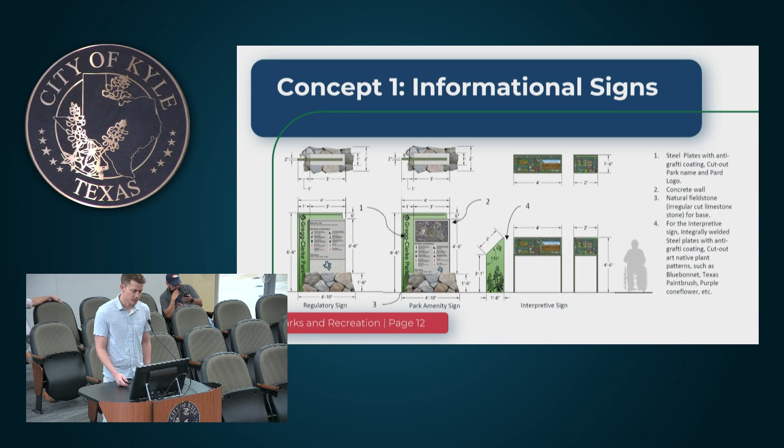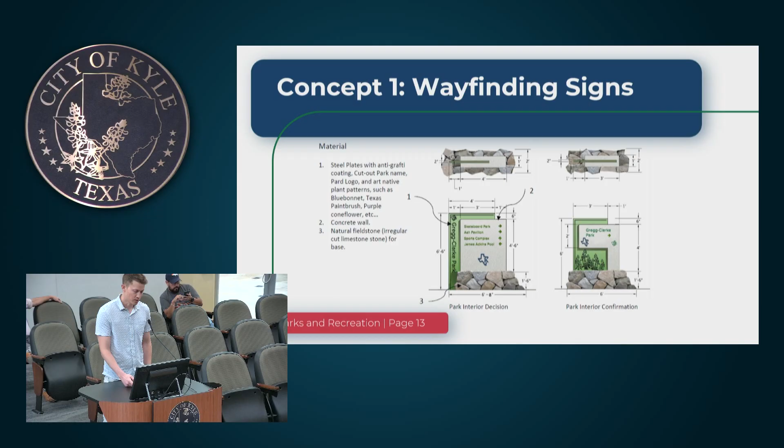These are the wayfinding signs - this is the vehicular wayfinding in particular, which also has the limestone base, the concrete, and the steel backing.

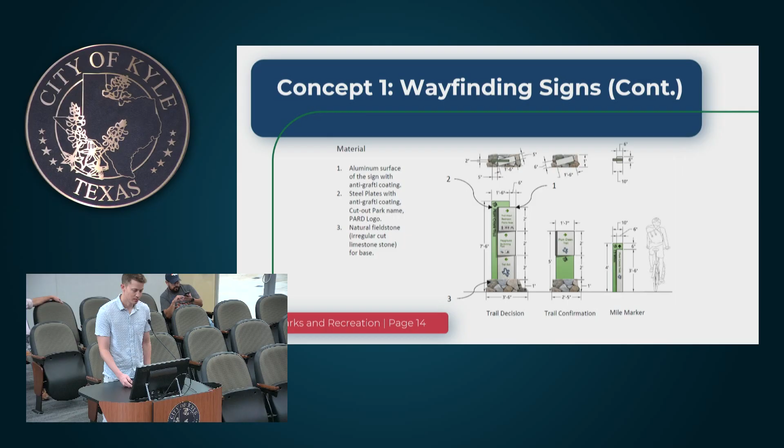And then this is the wayfinding for pedestrians. Instead of a concrete face, we use an aluminum one here, since it would be hard to install concrete at that scale. Another interesting thing about this sign is that the actual face is angled in the direction we're pointing people, adding a subtle design element to enhance the direction we're trying to tell them to go.

And then this is the night scene for that. So we wanted to give a view showing the lights, potential for lights with this sign, so that this also adds another potential way to customize these signs. You could use different colors for these lights. You could light up the plant imprint a certain color, or have the lettering in another color, or just have a color palette that you use to cycle through the various seasons or holidays, events, whatnot. Just adds another way that you could potentially customize these.

All right, moving on to concept 2, we called this one Refined Heritage. This one drew a little bit more inspiration from the European style that we mentioned earlier. So this uses CMU walls with natural stone veneer, and then a steel plate as a backdrop. So we have the historic look, but it's more of a modern construction method, so you get the best of both worlds.

We use native limestone boulder for these. These also have loose boulders, and they'd be rather large boulders, 2 to 3 feet in width, so that would give a different look than some of these other signs that we have here. And then modern accents, so we chose an aluminum surface for this sign, which we'll see next.

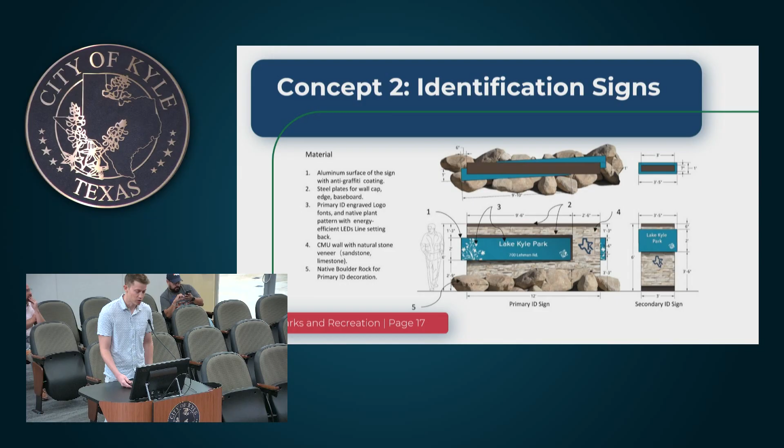Here's the informational signage, so it's very similar in look and materials. These will just provide the information internal to the park to the users. Some of the steel posts on those signs might be better suited as aluminum, but that's the kind of detail we haven't finalized yet.

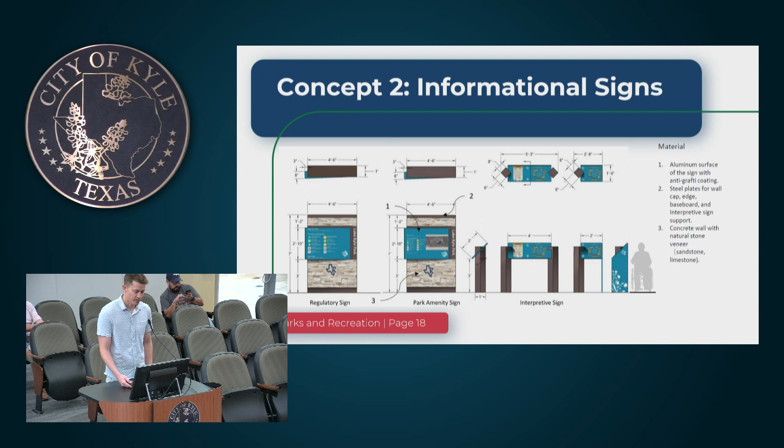And then here's the wayfinding signs for the vehicles. This is also very similar in material and look. And then this is just designed to kind of have signage pointing in a direction on the side that's pointing, so it reinforces the direction that amenity is located.

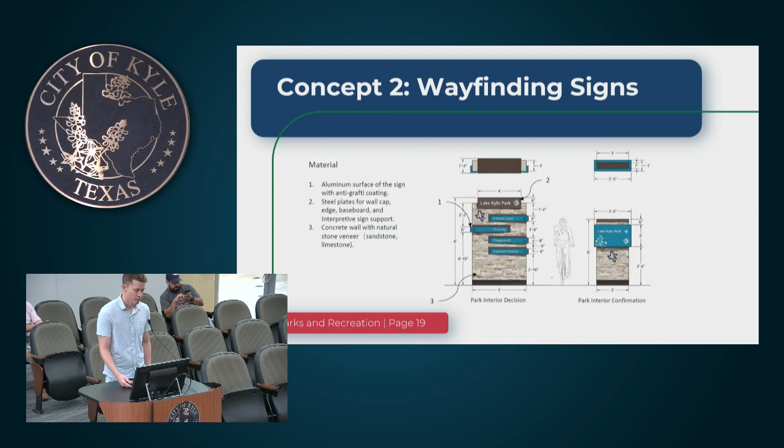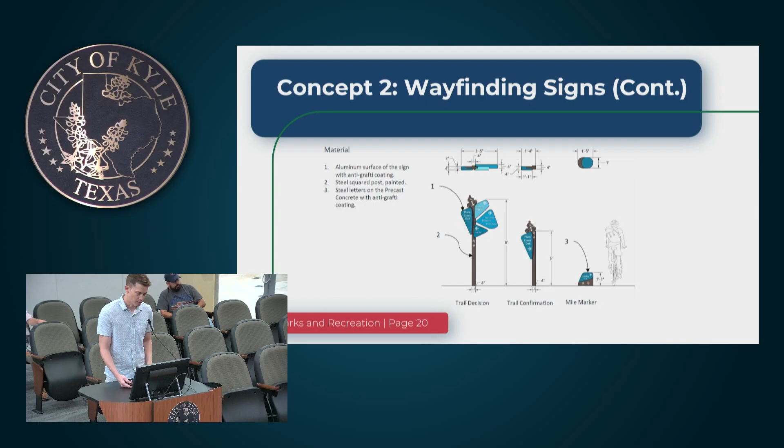And then this is the pedestrian wayfinding sign. So that sign on the left there, the Trail Decision, that's actually inspired by the PARD logo that you just asked about, Ryan, earlier. So we used the PARD logo to design that sign. We thought that was a neat little touch there. And then it would be the steel post with, I guess this one would be all aluminum if we substituted the steel for the aluminum. And then this is the night scene for that one as well.

All right, concept 3, we're calling Texas Patina. This really leans into the rustic look. We wanted to highlight the rugged and raw aesthetic found around here in the natural Texas landscape, using organic elements, color palettes, and materials. So we have a really earthy palette, and basically all organic materials for this sign. And then we have a raw weathering steel backdrop, or Corten steel, that provides a different look, and it's also designed to rust over time, creating its own story visually as it ages.

Before I get off that, one thing to mention with the Corten steel is that first, it's going to take about a year to rust. That first year does have potential to stain, so it's just something to keep in mind. If you pick something like sandstone underneath, that's not going to be very noticeable, but if you use, let's say, limestone with that, you might have noticeable stains there. So just an option there would be to use aluminum instead, or to weather it ahead of time.

And then we have the sandstone base, and then the wood backdrop. Another thing about the wood, you know, that obviously may not hold up long term like some of these other elements, and you would probably want to stain that every 2 to 3 years just to keep the color up.

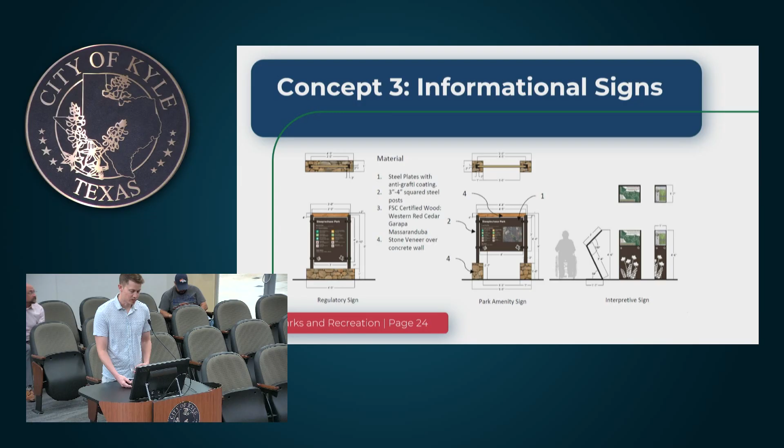Here's the informational signs, so very similar again. And then on the interpretive signs, we were able to switch that up a little bit and add a bit more unique look while still keeping the same color palette and overall kind of style of the signage.

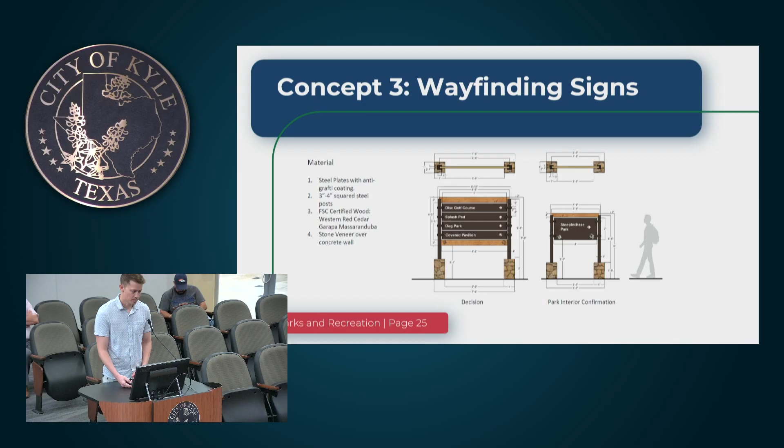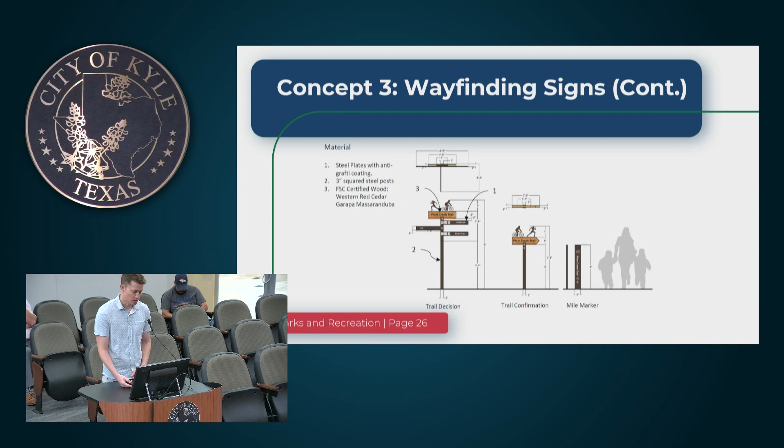Wayfinding signs, once again, very similar, and it's basically the same elements. And then this is the pedestrian wayfinding, which is a little bit different, but we were able to incorporate all the different materials into it. So you have the wood top portion, and then the steel post with the aluminum sign faces.

So as I mentioned before, we have potential to customize each of these signs with each of these colors really as it's requested by the owner or stakeholders.

Wayfinding sign position. So this is just an example to show where these signs might be located throughout a park. So if I can't really point, but along the major road there, Lehman Road, you'd have the identification signs, the primary and secondary identification signs, and then kind of around the amenities like the pool and the other elements in there, you would have the informational signage, and then throughout the trail, the internal roads and trails is where you would have the wayfinding signs.

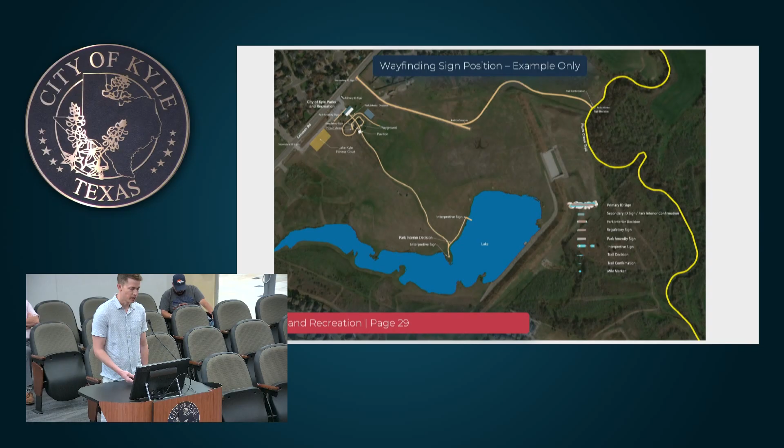And so the wayfinding could also provide a mile marker, so that would allow people to know how far along on the trail they are and how much further they have to go.

And then questions and feedback. So looking at all this, you want to do this part?

Thank you, Chris. I have a question. Is there a reason that we're not going with the blocks like are on our Kyle signs?

Because the first one looks the most similar to the signage that we have that we're using kind of for the city anyway. But that limestone is kind of more like a river rock dry stack look. And if we were to use limestone blocks like are on our Kyle signs, then we would have cohesiveness through all signs in the city, not just parks versus city signs.

Yeah, no, great feedback, and that's the exact feedback that we're trying to get. So there is, like you mentioned, existing signage, those monument signs into the city or gateway signs into the city that we did have some inspiration from, but because Parks and Recreation, we're trying to create that identity for parks. So how do we separate that? So whether it's incorporating that base material, that could very well be something that we feature here.

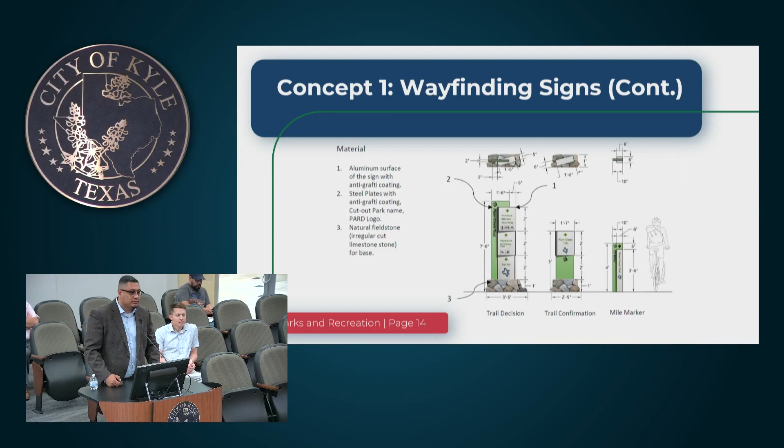Based on the 3 concepts here that you see today, staff reviewed these, and we thought all 3 options are really good. There are some things, like you mentioned, about the maintenance component. That's something we're trying to explore and be cognizant of, whatever we put out there we want to be mindful of the impact, not only aesthetics, but also maintenance aspects.

Which one of these can you rank in terms of cost? Good question, I'll ask Chris to speak on that. We haven't necessarily gotten to that point yet, but from my understanding these are all pretty comparable, in the same range of costs. There's going to be some elements depending on the steel, if you substitute aluminum that's going to save a lot of costs on this one in particular, but we haven't done a deep dive into cost yet, just very high level.

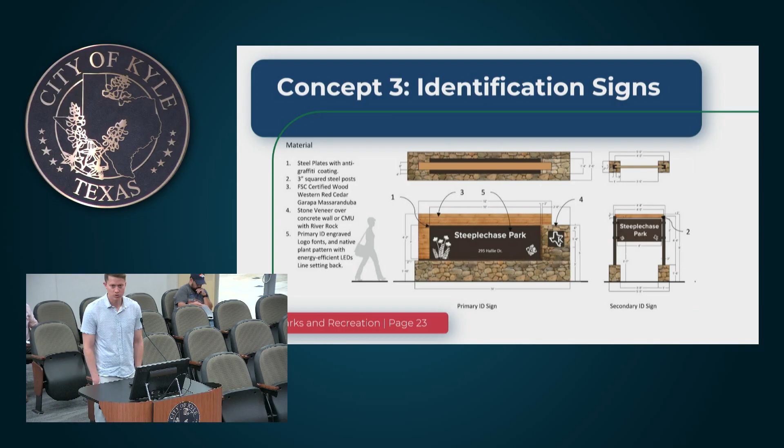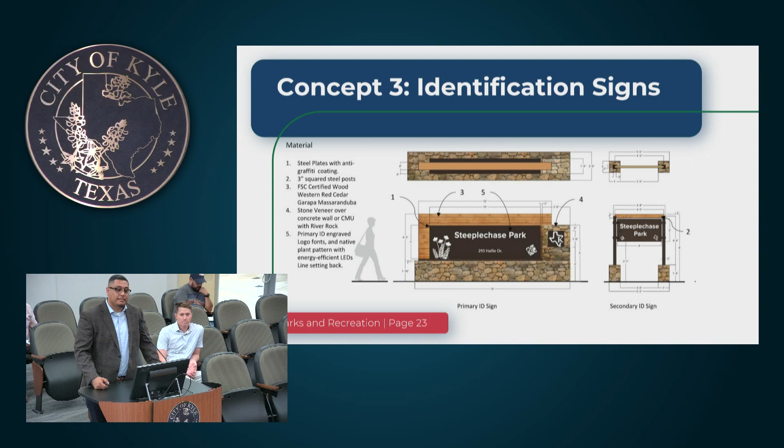Do y'all run this through ADA compliance, that the text is visually legible to anyone with visual issues? Yeah, this is very high level right now, but with interpretive signage there's the ability to have Braille or different components to feature in those signs. As far as the ADA component on where you place them on sidewalks or pathways, there's a certain standard that has to be specific, so that is being taken into account.

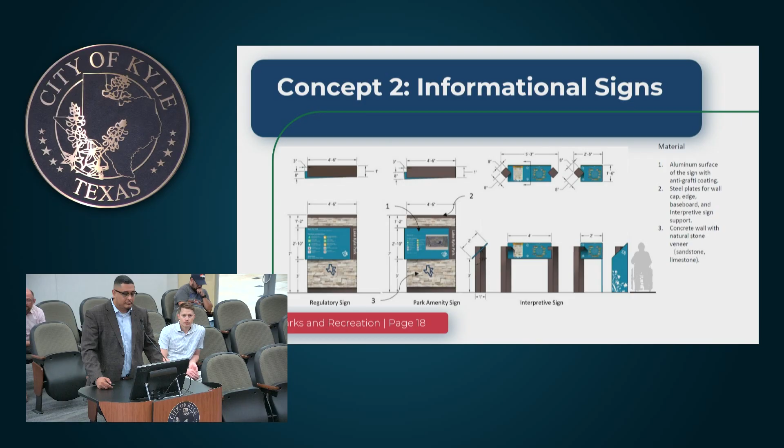I just learned there's a certain text that's not 508 compliant, which I wouldn't have known since I'm visually abled. So something to take into consideration, you don't want to prohibit people because they can't see the signs. We recently had an incident in Button Creek where someone got bit by a snake, and the sign had bluebonnets behind it and they were visually impaired, so it was the sign that said warning of snakes. Second question, if it's lit up in the evening, does that create any issues for our dark skies initiative?

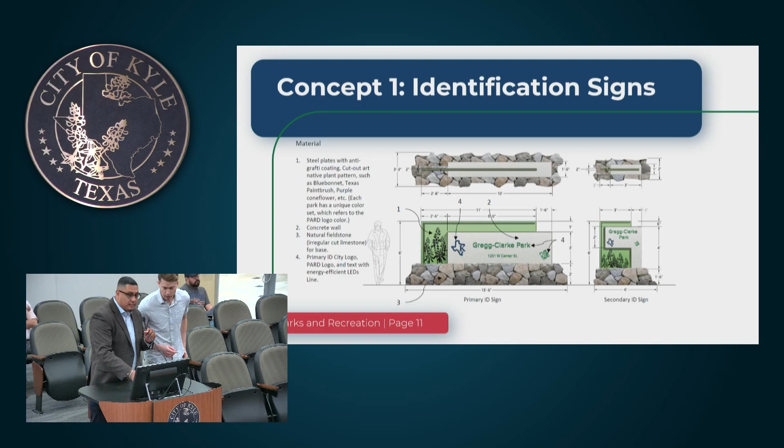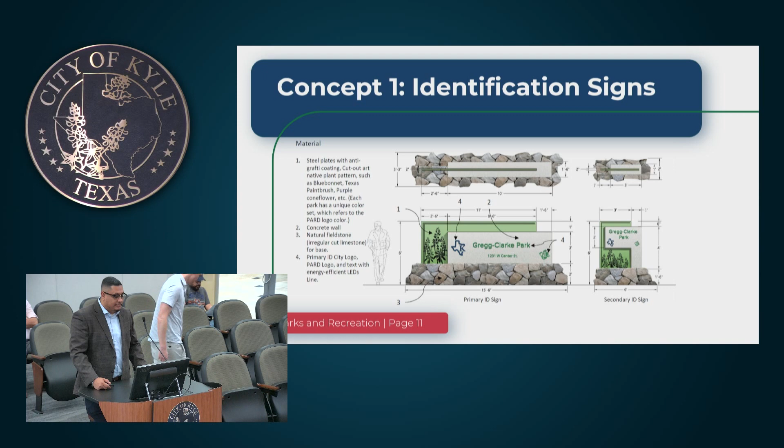And that first sign, is that metal? Is that a metal sheen for the green one? If we go back to concept one, I want to say that was concrete backing, a concrete wall. The gray, oh, the gray yes, that's concrete. Mainly asking if it's metal, then it could be super shiny on a sunny day and cause issues. Yeah, that's concrete, but the green you see is metal. But there's a way to incorporate aluminum, and maybe with the finishes we can explore eliminating that sheen on the reflection aspect.

Well, I think that these are amazing. My preference would be concept 3, then concept 1, then concept 2. Okay, thank you.

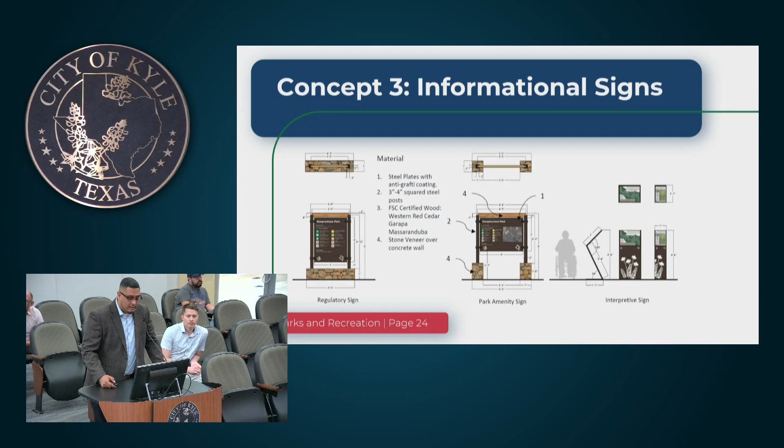1, 2, 3 - I liked 1, but with 3's wayfinding, how that was laid out, with the cutout, the interpretive, I like that. I don't want to pay to maintain 3, with the woods. And that could be something, as Chris alluded to, that we can explore. But appreciate the feedback.

Is it safe to say that since we don't really have an identity yet, we're still storming and norming, this will set the identity of the Parks Department? Like whatever signage we use will be us? Absolutely, and that's one of the things I mentioned at the beginning that we're excited for, because that's very well what it's going to do. It's going to start setting the identity for the park spaces. As we improve the parks with various amenities and facilities, and introduce the community to these spaces with wonderful aesthetics, it creates this new aspect overall of the park itself. We're truly excited to see what that does. But you're absolutely right, from the branding aspect, it for sure will do that.

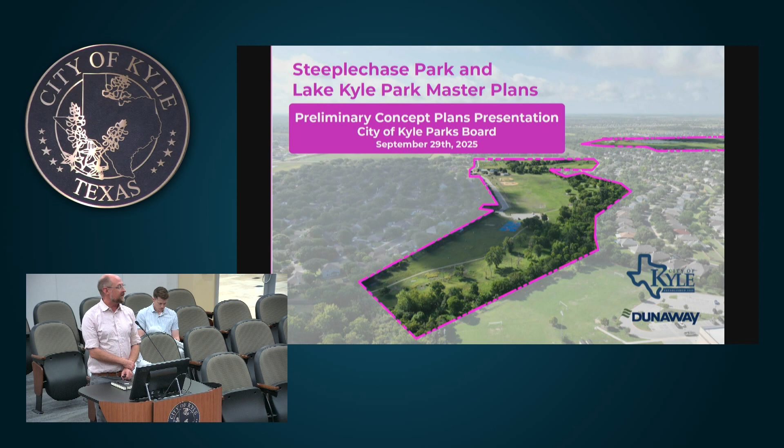We are fortunate to be working with the Parks Department on the master plans for Lake Kyle Park and Steeplechase Park. We are quite early in a very fast-moving process to define the vision for these. This presentation is the first major public showing of our design concepts. We've had the opportunity to interface to some degree with community members, but a larger portion of community engagement is to follow this. So tonight we're really excited to get your input on directing these concepts, refining them, and how we take them to the public moving forward. We'll also be following up with council after this meeting, then coming back to you with a refined, final recommended presentation for both parks in early 2026.

I already introduced myself, the team at Dunaway. I'm a landscape architect, I've been practicing in Austin for 13 years now. My team here locally is working closely with Kelsey Ross and Shelby Horton, and I want to give them special recognition as major players. We're also joined by our in-house civil engineering team to make sure we are providing concepts that will be engineering proof. I'll spoil a little of the ending, but there's a lot of floodplain involved.

Coming in very broadly, what we heard about building up these master plans is that we want parks that are uniquely Kyle. We recognize, especially with Lake Kyle Park, that we need to build in flexibility between the everyday use of these parks and the big events, like the Kyle Fair and movies at the lake. And in the case with both of them, striking this balance between human activity and conservation activity. The watersheds, both ecological and social, are really critical on these two sites.

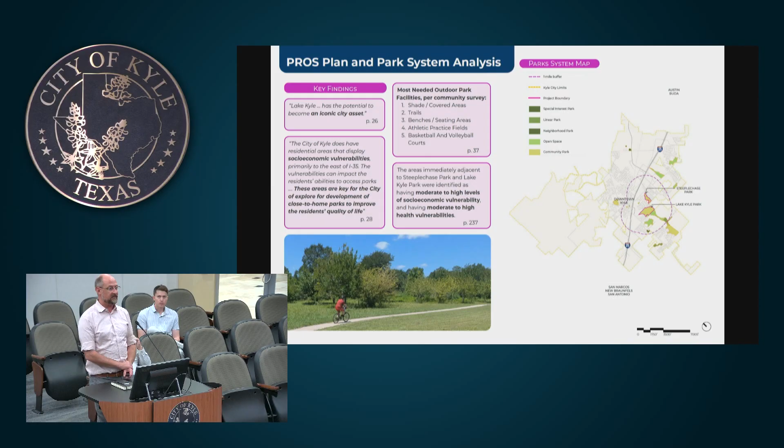Again, we are building off of the PROS plan, which you've heard mentioned in the other presentations, a map derived from that plan. These are both designated as community parks. We were able to distill a lot of early recommendations that set us on the right footing for this project from that plan: shade, shade, shade, the desire to create community assets, and recognizing the disparity in access and opportunities between the east and west areas of I-35.

I spoke to the watersheds a little bit. The social watershed, you've heard about the Vibe Trail in some of the presentations tonight. The Vibe Trail is slated to run through both of these parks, actually connecting the two parks to each other. That multimodal system of transportation is going to be a huge boon to this area. We wanted to acknowledge the five-minute walk shed shown here in pink, connecting a number of residential communities.

Three elementary schools are within a 10-minute walk of these two parks, particularly Steeplechase, really nestled there between Tobias, IDEA, and Fuentes. That's a prime location for looking at the Vibe Trail and the park improvements as sort of an extension of safe routes to schools.

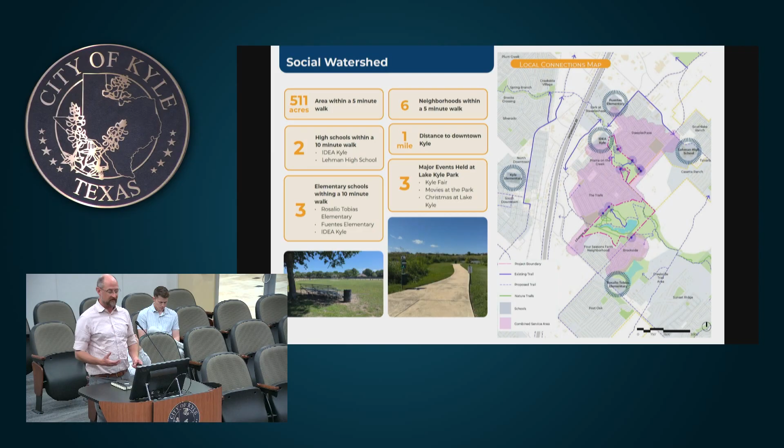And the floodplain—most of both of these parks is floodplain. Those of you who were around in 2015 know that pretty well. Lake Kyle Park looked pretty much just like that, except it was muddier in our section. But these are both, as I mentioned, critical areas along the waterway. Your parks are very important homes, not just for local wildlife, but for migratory wildlife, building the rich ecology of the Kyle area.

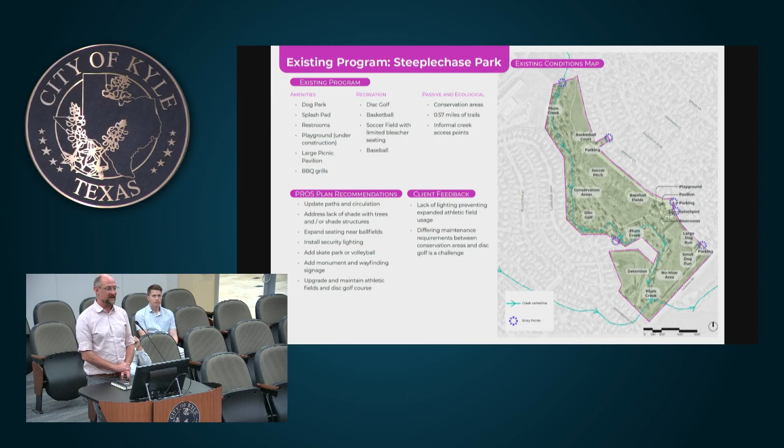You guys know these parks, so I won't belabor them at length, but just to speak briefly about Steeplechase Park: this is 45 acres, with an informal baseball field, soccer pitch, dog run, and significant conservation areas maintained by PARD. This is the city's only disc golf course, and it recently had an extremely successful ribbon cutting for the new playground. I think if we can get a tenth of the people who attended that event to engage on the public engagement section of this, we'll be in great shape on numbers—truly impressive crowd for that.

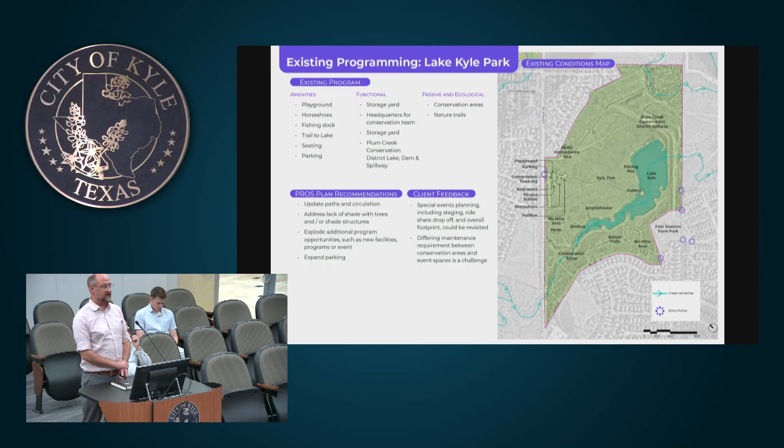Lake Kyle Park is 118 acres, mostly Plum Creek Conservation District, a water management area. This is where you host the Kyle Fair, and where a number of other smaller events happen. Also, again, with significant areas designated as conservation areas, adjacent to the Four Seasons Farm Park, which is also parkland dedication—we'll come back to that connection. PARD maintains a maintenance operation on this site; the maintenance yard is on this site. Also, there have been investments in a playground, and the recent outdoor fitness center is the latest addition to this park.

So to speak a little bit about our process as we looked at what was happening on the parks and what wasn't happening, looking at areas where maybe some places too many things are happening in the same place and they get in each other's way - you're trying to watch a soccer game and a frisbee is flying at your head. Or you're trying to do conservation and we're walking all over the roots of heritage trees.

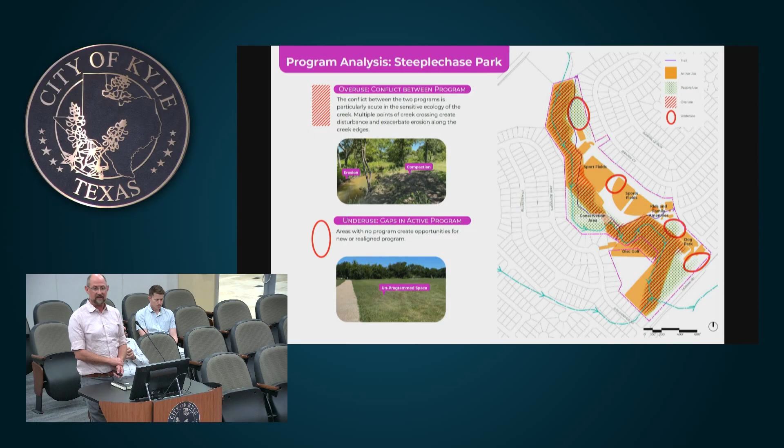You do have active fishing, birding, the playground, and other gentle hiking, and the new fitness activities going on.

So I'll pause here to say we are showing you two concepts for each of these two parks. In my mind, and to some degree in our team's minds, these are two parts of the same park - we see them as linked. We are showing concepts meant to explore the discussion about how we want this park to be. What is the overall character of this park? And we're going to set the table with a little bit of character imagery.

I've underscored the critical natural areas and conservation already going on with both of these parks - we want some of the imagery to reflect that. We also want these parks to be destinations and to really signal themselves as destinations from the street. Right now, neither of these parks has a particularly strong street presence. If you know where to go, you're going there, but they do not necessarily go out of their way to announce themselves, although the monument signage stole my thunder a little bit on that.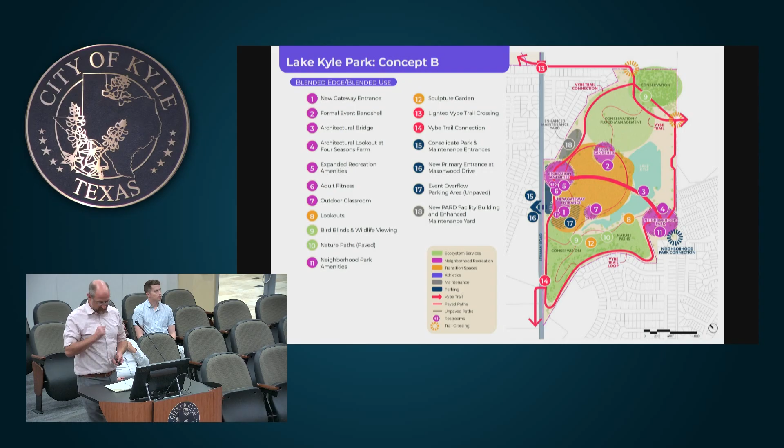In contrast, concept B is more about transition. The big move here is actually connecting the neighborhood to Lehman Road. In this one, the Four Seasons Farm Park becomes a more active neighborhood park with a very direct connection to the entrance at Lehman via a signature bridge built over Lake Kyle.

In addition, we look at a paved pathway around the entire periphery of this park, including behind the PCC dam structure, to create a series of concentric walking loops and really emphasize the connection of the neighborhood to the east and south, to the neighborhoods to the west and north.

In this concept, we take a more nuanced approach to conservation. Perhaps paradoxically, some of the concrete pathways will actually assist PARD in their conservation efforts by clearly delineating areas of different mow techniques and encouraging public use of the concrete spaces, with a softer touch on some of the nature paths. This concept does envision more ADA access within the conservation areas through paved pathways, but generally speaks to the same light-footed approach to conservation areas that was in the first concept.

For parking, we do not introduce any parking into the park. We merely extend the parking along Lehman. That reduces the footprint of parking in the park; however, it also decreases the amount of park fronting the street and makes parking a larger barrier. So there's lots of ways to look at parking, but we recognize with this level of connectivity and the growing number of events at this park, we're going to need to find a way to park it, and we're looking at the best and least obtrusive way to do so.

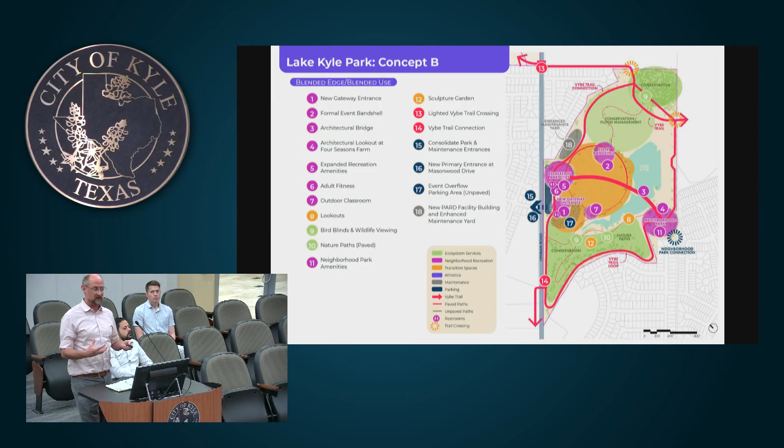Another idea that could probably be added to either of the two concepts, but we're placing it in this one, is actually moving, in the long run, PARD's maintenance operations out of the existing building and allowing that to grow into a more full-use visitor center, then building another building for PARD operations at the site of the maintenance yard, allowing the back-of-house functions for PARD to be more consolidated and not the first thing you see when you come into the park.

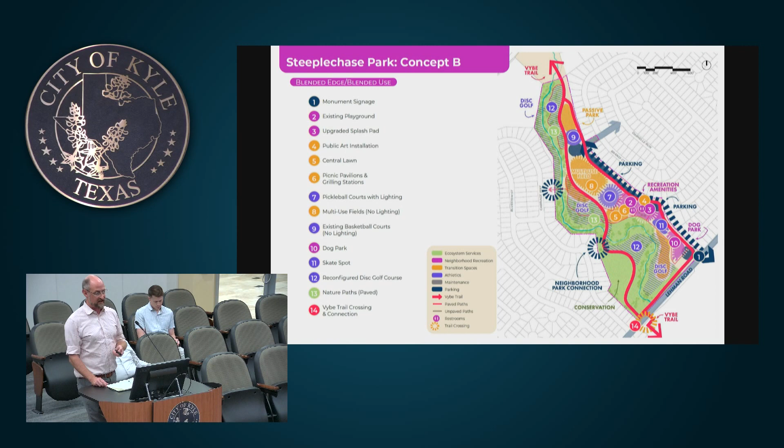PARD is already working with the disc golf community on short-term alternatives to that layout, but we would be looking to try to find ways to place pins in ways where you're not throwing so close to the creek, to minimize creek crossings, and to minimize conflict areas like we see today between some of the areas for spectators in the shade watching soccer and football games and the disc golf course.

And finally, breaking out the two big ideas of those parks, that was a lot. I'm going to return to a side-by-side of concepts A and B for Lake Kyle Park, and I have the same slide for Steeplechase Park. Happy to go through either of these as we have questions. I wanted to move through this as quickly as possible so we could spend more time hearing from you. Thank you.

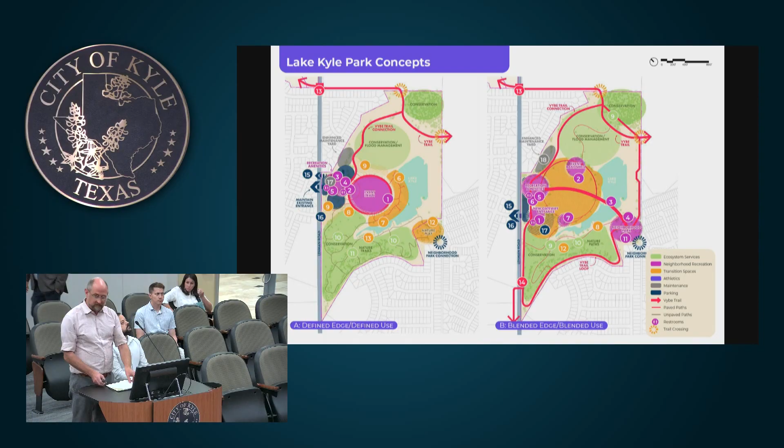On concept B for the Lake Kyle Park, have we done a traffic study on moving the entrance? Because big events in that neighborhood right there is a nightmare.

We have not. That's great feedback for us to look at as we develop these. You already do have the apron accesses there, and you already do use those for overflow for events. So I'm cautiously optimistic, but we will look into the impacts of that.

Okay, and maintenance-wise, is one easier to maintain than the other? There's a lot in that question.

I think what I highlighted about putting the paved trails in the conservation areas actually came from the Parks Department. We brought the idea, and they noted that, paradoxically, having that paved area might help their staff understand the difference between a full no-mow area and a wildflower seeding area. We're able to transition those areas. Right now they've got them kind of flagged off, and mistakes get made and the wrong things get mowed. So there's a simplicity to that.

There's a clarity, but conversely, you add more concrete, there's cracks, there's long-term maintenance tied to that. So I would hesitate to say one is easier to maintain than the other. They both have their drawbacks and advantages in that regard.

Like most everyone else in this room, we've reviewed the recently adopted PROS Master Plan, and one of the things that stuck out to us were three concepts: the nature experience of a park, it needs to be a vibrant destination that people actually want to spend their time and recreational dollars going to, and it needs to be balanced and connected. So this is the framework we're basing some of our layout and design decisions on at this point.

With that, I'll turn it over to David, and he's going to walk you through some of the thought that went into these concepts. Apologies, I have to lower the microphone.

Thank you again for the opportunity to present to y'all, both Waterleaf and Greg Clark. Before we get started, if y'all need to do any exercises to stretch your legs, you're not going to hurt my feelings. Though the chairs look comfortable, if your legs are as tight as mine right now, you probably deserve to stand up. So like Brian mentioned, we're going to approach these two park concepts by showing one concept per park. We tried to diagram this out so our process and decision making hopefully makes sense, to help guide you in understanding how we derived these initial concepts.

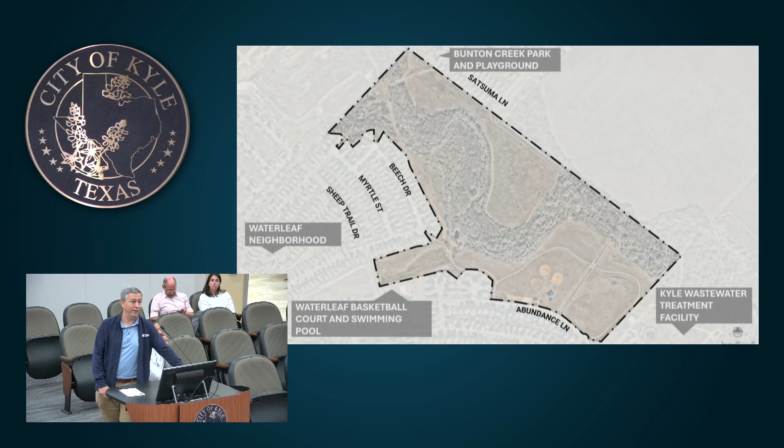As a second assessment of this site, those who have been out there know that Plum Creek plays a heavy role in providing a nice amenity that we can hopefully leverage in our conceptual design. But you'll see it also divides the site quite nicely into two zones, and we'll cover that here in a minute.

A critical piece to this is that drainage swale. If you've been out there, it divides that roughly 20-acre corner into two distinct spots. When it rains, it's hard to get across without getting muddy. So we want to begin to think about how that can be integrated into our conceptual work.

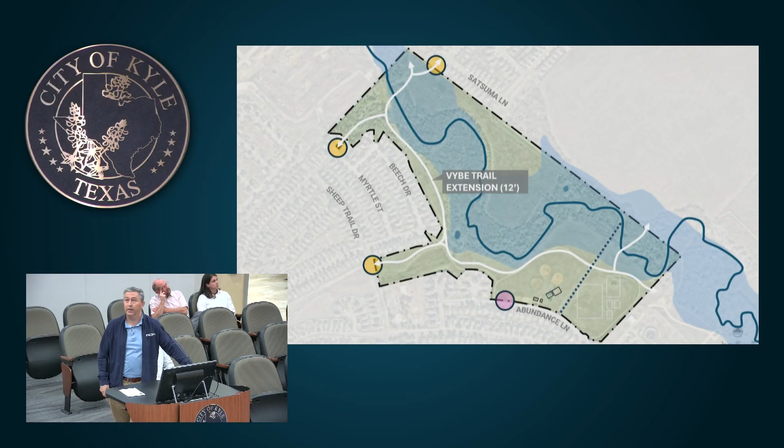What that starts to now define are these use zones, to sort of walk you through, and we'll start north and work our way south.

What we're wanting to do is integrate another hierarchical trail system, these smaller internal park trails, which are more 8 foot in width, something a little bit more specific to individual users within the park. What we're wanting to do is tie these two sites together. You'll see that we actually span across Plum Creek. The idea is to reconnect both sides.

What we're going to be focusing on, as the concept moves forward, is looking at that north portion of the site being more ecologically based, while the south side becomes more active recreation based. Some of the key points here, if you've been out there, there are some existing structures on site today.

Which are the maintenance facility, maintenance shed, and right adjacent to that is the restroom facility. Adjacent to that is an existing playground, and currently in design right now is an expansion for that playground. So what we began to look at is having those structures start to define the orientation of our proposed amenities.

So in those oval spaces on the southeast corner, we've been able to maintain those three baseball fields. We've slightly reoriented them so there's a direct line of access to the restroom facility, since right now it's a bit circuitous to get there.

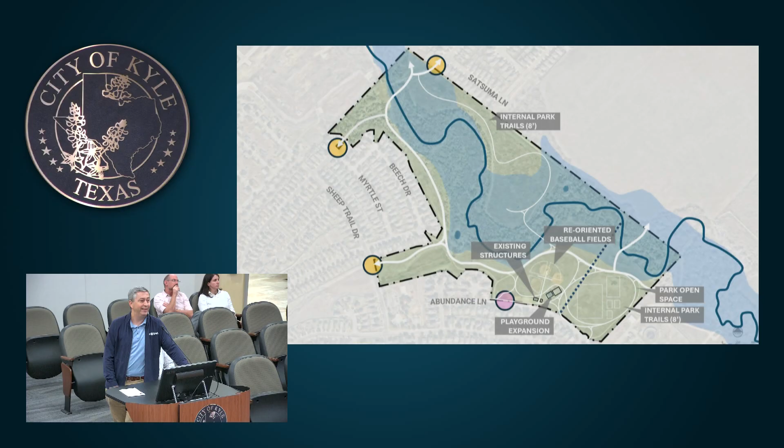As we build upon the hardscape elements, we began to integrate more of these softer touches to the site. In the nature area, we began to integrate soft surface trails, unpaved surfaces that allow ingress and egress throughout the tree area.

Knowing that part of the northern corner is covered in floodplain, we thought it'd be nice to integrate a boardwalk—something ecologically based, relatively easy to maintain considering its height and elevation—to get you to locations you normally couldn't reach during a rain event.

Tied to that, one of the key components is the straight line channel that carried through there—we want to meander that slightly, turn it into an amenity, not an eyesore or a hindrance. So that blue dashed line begins to meander throughout the southeast corner, helping tie those two sites together.

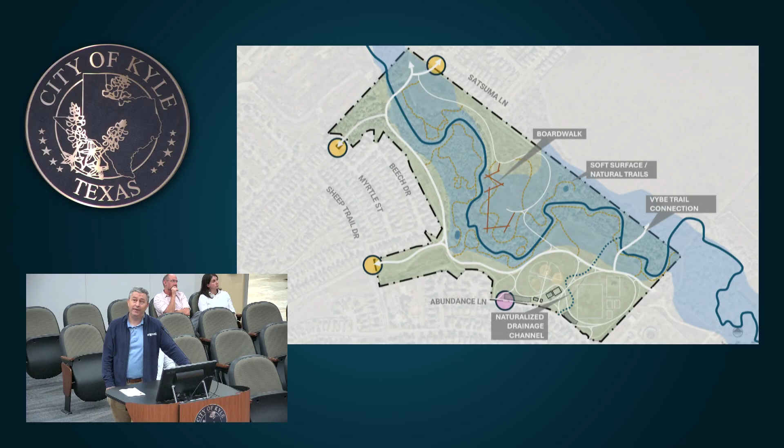Similar to the previous presentation, what we want to do is give you a sense of what some of these key elements would look like and feel like.

Starting at the top of the screen and working our way down, the idea of traversing Plum Creek is very important, so utilizing those pedestrian bridges in a way that allows ingress, egress, and connectivity across the site will be important. Then we're looking at integrating those boardwalk elements, something ecologically focused, that allows access into zones you may not have access to during rain events.

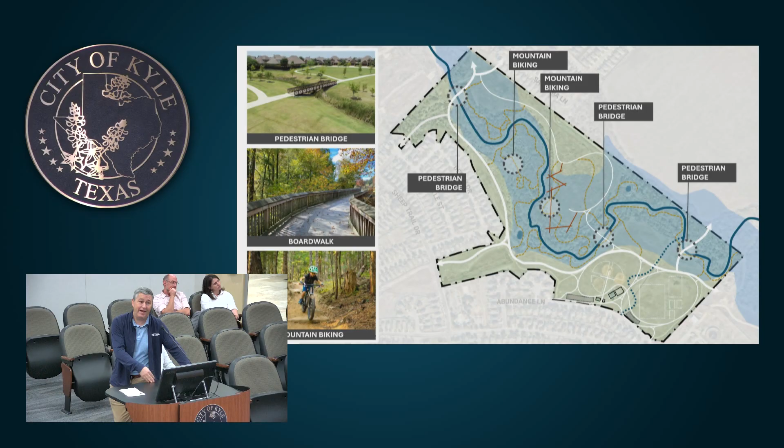The conversation has been had about the potential for mountain biking out there. I know they're currently using it today, but can we maintain that and hopefully expand upon it as needed?

Extending on the ecological side, integrating some of the cool signage these guys are making, designating those wildlife zones so maintenance crews won't mow over them, integrating some of the more ecologically focused signage, and looking at an extension of the existing bird blind out there today.

Extending that, looking at some of the trail surfaces—that surface trail as the point of connection through the trees—and making sure we create a nice experience for the Vybe Trail as you traverse across the site.

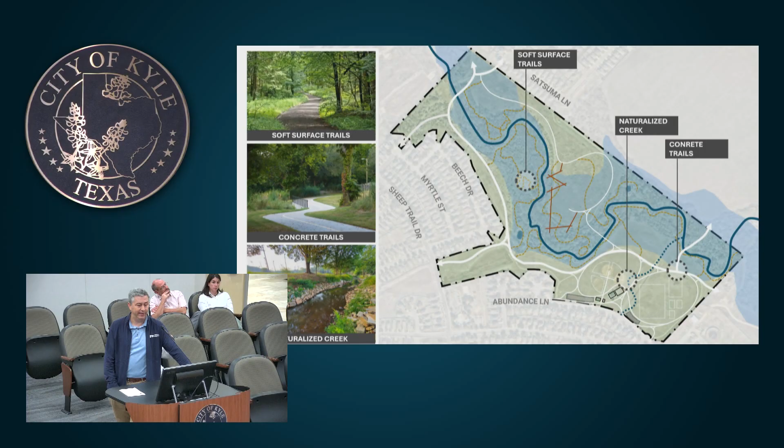Lastly, looking at that creek meander, trying to renaturalize it to make it a focal point and not a hindrance. And maintaining some of that flex space on the southeast corner—it's a beautiful space to be in, people use it today, and we want to make sure we maintain that.

And then taking into account access to the playground—obviously that's currently in the works, so we're working with the playground manufacturer to truly understand what we're doing there. And lastly, maintaining those ball fields—they're used, it's silly to take them away unless there's another site that makes sense to move them to. So keeping in mind the existing program, we're trying to reinvent what's out there today through integration of unique and special things to really start to create an identity for Waterleaf Park.

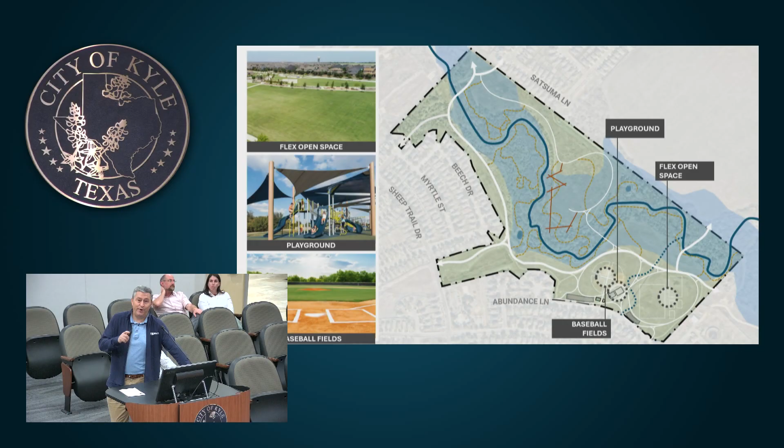Now we're going to go over to Greg Clark, again following the same cues and same processes. Greg Clark's a little bit different of a park—I'm sure many of y'all have been out there since it's sort of a stone's throw down the way. But it is an interesting park to be in, if I put it one way.

So again, how do we work with some of these existing constraints to better define and create an identity for Greg Clark? For us, what we try to do is process spatially what we see.

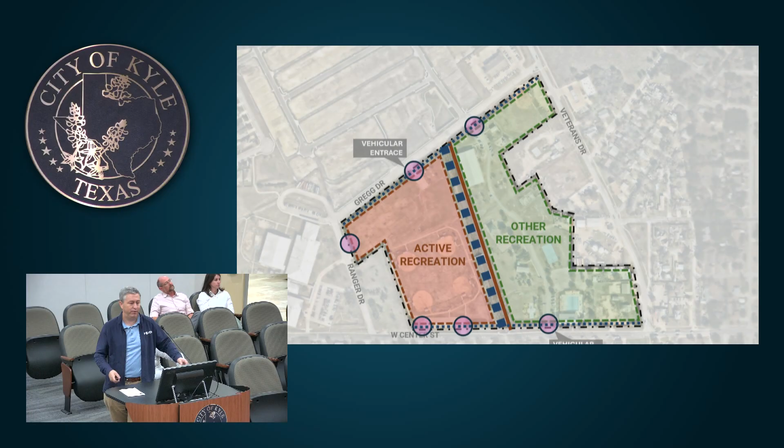Most importantly for us, we want to simplify these points of connection. If you've been inside, it can be a little confusing on how to get to where you want to go. So one of our first steps was to re-identify where these entry points are and simplify the vehicular connectivity throughout the site.

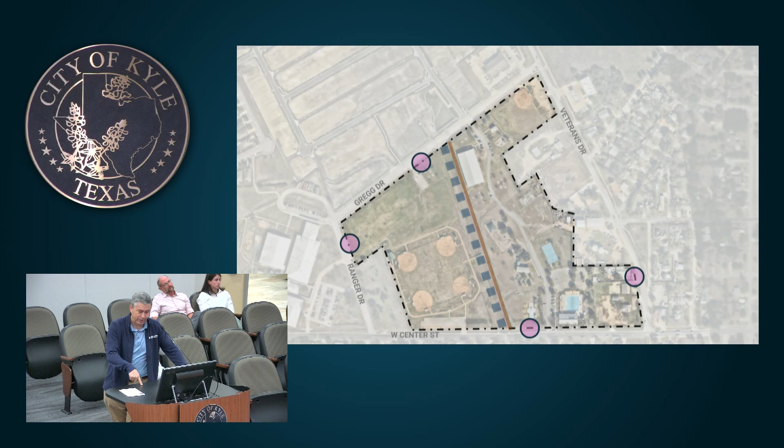The way we've done that is we've pigeoned those into really four key entry points: one along Gregg Drive, one on the west side along Ranger, one along Center Street, and then one potential entry off of Veterans tied to the aquatics facility.

What we began to do is look at the idea of the sense of arrival. Again, the one key thing missing from Gregg-Clarke is identity. Hopefully this arrival point, this sort of roundabout, will allow people to enter the site and begin to orient themselves based on hopefully some cool signage that helps bring people to where they want to go, along with a simplified vehicular circulation within the park to make it easy to get to where you're wanting to go.

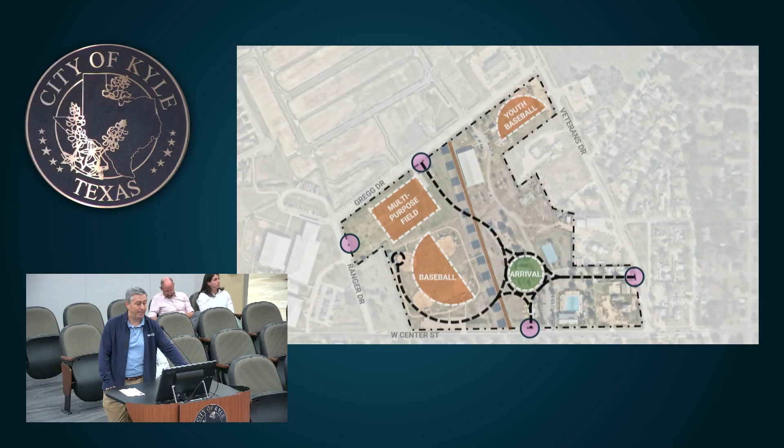Carrying some of the programmatic ideas: we've simplified the ball fields on the west side by enlarging those slightly and creating two baseball fields. We've shifted the soccer field over and made it an actual full-size field to accommodate actual play. Then we're looking at reorienting the youth field on the northeast corner and doing two small T-ball fields at that location.

As part of that, obviously we have the Ash Pavilion, which we definitely want to keep. As part of the current design, we're looking at ways to implement the new skate park that's being designed as we speak.

Associated with that skate park, we want to bring in what I'd define as the action sports: volleyball, basketball, tennis, the things that make a lot of noise, trying to hone those into one general vicinity. And then, as hinted at with the aquatic side, taking the feedback we've received from our study, we're looking at whether there's potential to expand that, and whether that makes sense.

As part of this concept, we looked at expanding that and making it a little bit larger to provide additional amenities that aren't there today. And tied to that, similar to what we did for Waterleaf, we wanted to reinvent that central drainage channel and make it an amenity, not a hindrance.

So what we began to do is meander that throughout the site. That allows us to blur the line between east and west and reconnect both sides, highlighted in gray. We began to conceptually locate where the potential parking could be for each of these amenities, and each one is tied to an associated program.

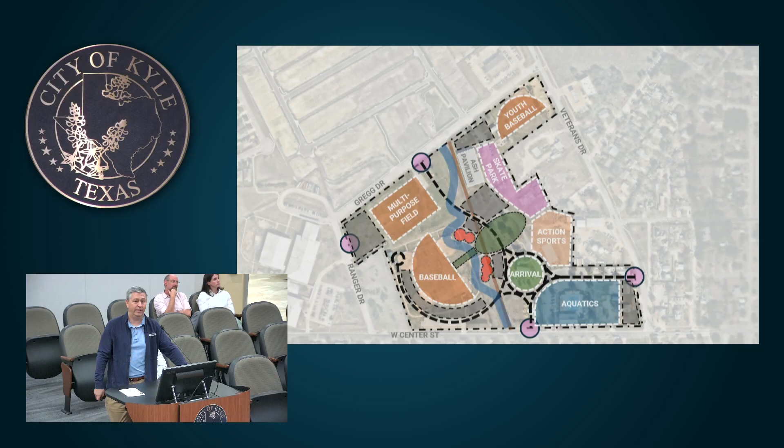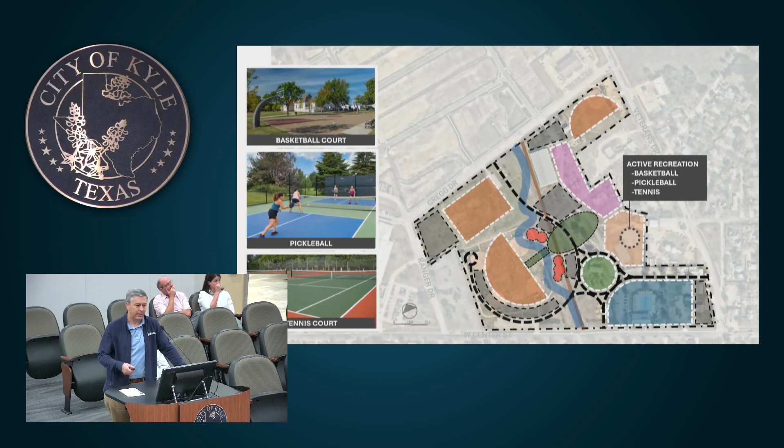Quickly highlighting some of the aesthetic components. When I defined active recreation, what we want to do now is introduce back in basketball, maybe pickleball if it works, tennis, volleyball, things like that, honing those into one location.

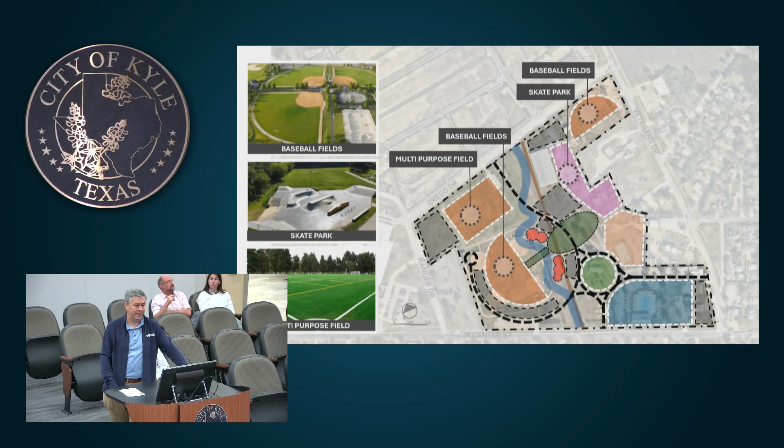Looking at the expansion of the baseball field, making those a bit more functional. Looking at a multi-purpose field, sizing up the soccer field to be fitting to the context of a soccer field. Looking at the proposed design for the skate park and how to integrate that into the overall context of the site, and providing that central open lawn for the larger events that may happen on site.

As part of that, we talked about identity for the park, but maybe we can begin to integrate a themed playground, something contextual to Gregg-Clarke and the city, to help bring that identity. And reinventing that splash pad in a location that's more fitting and central to the site to create that hub of energy.

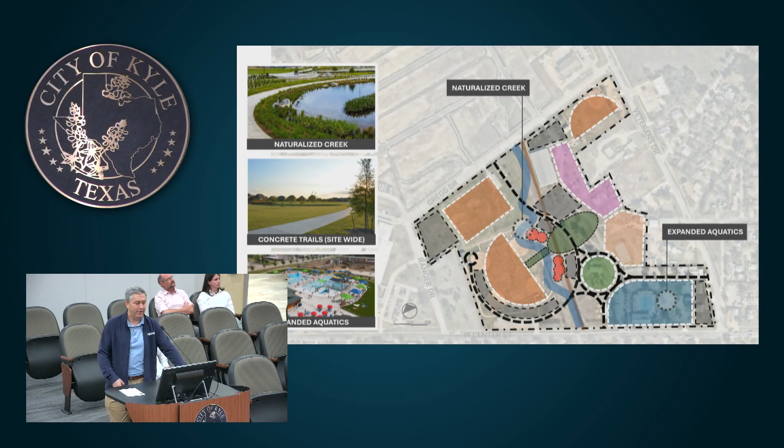Lastly, highlighting the importance of naturalizing this creek. You can still maintain hydraulic function but make it in a beautiful aesthetic way. And then using those trails to interconnect each one of these programmatic elements.

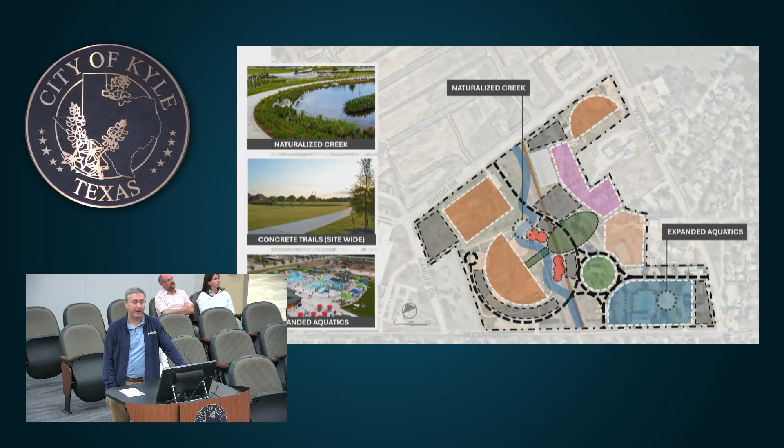And lastly, the sky's the limit on the expanded aquatic, something we're currently assessing, and hopefully we can begin to look at what that looks like as the project moves forward.

Don't know how I did on time, but hopefully nobody's asleep. But with that, we'll open it up for questions. Again, just to reemphasize, this is just a first take, so any guidance, any feedback would be super helpful for us.

Gregg-Clarke is a completely different timeline and cost.

That's a good ballpark question. I don't know what the cost would feel like. Everything changes, all the roads — you're knocking down almost everything and putting back something completely different. That feels like years of not being able to use that park, and it'd be great, but that's years of not being able to use that park potentially. So do we have money identified for that much work? That feels like a wildly huge project. It will definitely be a wildly huge project, but it will be phased.

For example, the skate park is essentially phase one, and it's within a defined area and it is budgeted for. So every time we do a new phase, it will have to be absolutely budgeted for and accounted for from both a design, construction, and long-term maintenance perspective. So all of that will be taken into account. Does that answer your question?

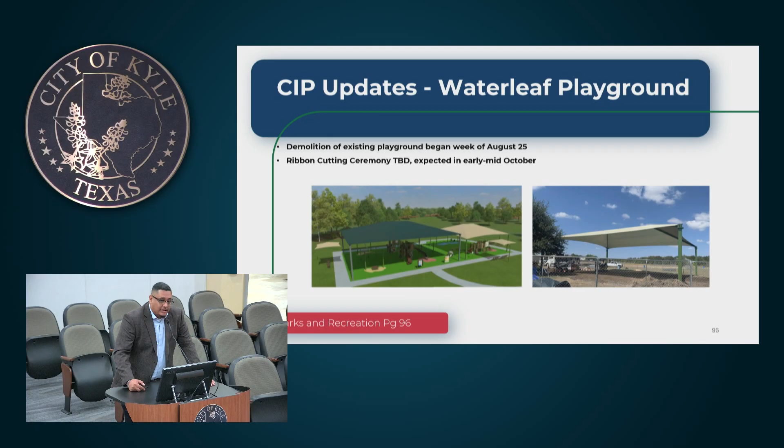Waterleaf Playground, this is active. Every time I drive out there, if you were out there this past weekend for the 5K event, you noticed there was construction going on. The playground structure is up, they're still working on it, currently forming the sidewalks for the trail itself. We do envision having the ribbon cutting ceremony sometime around early to mid-October. I think it'll be closer to late October, but we should have that information shortly to invite you all for that ribbon cutting. So we're not far from there.

Skate park - I want to invite you all to the groundbreaking ceremony. If you haven't already, you'll be receiving notification to invite you for the groundbreaking ceremony on October 24th, for us to hit the ball going over at the skate park itself. It's going to be just public speakers, pretty low key, but it's one of those components we did want to celebrate as a major milestone. We do expect construction to follow not too far after that. We're currently finalizing an early grading permit to get the ball rolling again and start moving dirt out there on site.

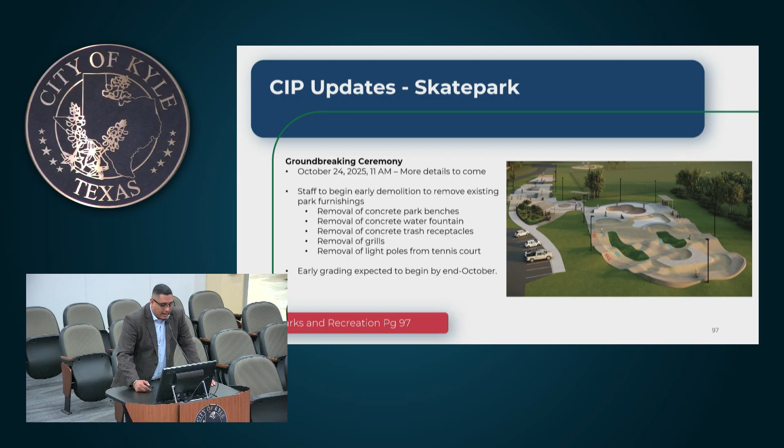I would say staff did remove quite a bit of park furnishings - we messaged through our social media pages that we started removing lights, trash receptacles, water fountains, and park benches. That was part of the scope the city had to do in order to get the ball moving for the contractor to come in and start moving dirt. So that's well underway, everything's been removed. Really, we're just waiting for the groundbreaking ceremony to get started, so we'll be inviting you all to that here soon.

The Mary Kyle Hartshorn Restroom, Fountain, and Krug Center - this is an ongoing project. We hosted an open house on September 4th. It wasn't attended in the sense of the other PROS master plan events, but we feel like we got quite a bit of good feedback. There's 3 different scopes to this: a full design for the restroom, a fountain reimagining the fountain itself, and a feasibility study for the Krug Center - how do we maximize its current use or floor plan, can we redo the bathrooms, all those various components currently there. So there's been a number of assessments conducted.

We did go to the Texas Historical Commission, and we've had a couple meetings with them. As you're all aware, it's a historical site, so there's also been permits filed in the past. We're trying to understand what can happen, what can't happen, what's the process for us to create the restroom itself. So those are all channels we're working on, and we actually had a meeting this past week with the Hays County Historical Commission, just across the street here at the train depot. It went very well, we got a lot of great feedback.